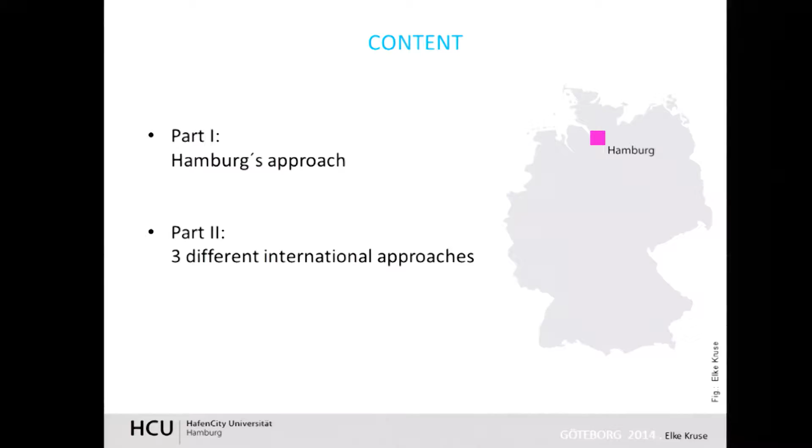In the first part of my presentation, I'm going to tell you a bit about Hamburg's approach in dealing with stormwater management. And in the second part, I will present to you 3 different international approaches, which are also dealing with stormwater management, and they are pretty similar to the things we already heard this morning and also this afternoon.

First of all, some facts about Hamburg. Hamburg has a lot of open water bodies, and therefore we really have to deal with water or with stormwater. And the annual amount of rainfall is similar to Gothenburg and probably also to Seattle, as I just learned. And at the moment, we've got 1.75 million inhabitants in Hamburg.

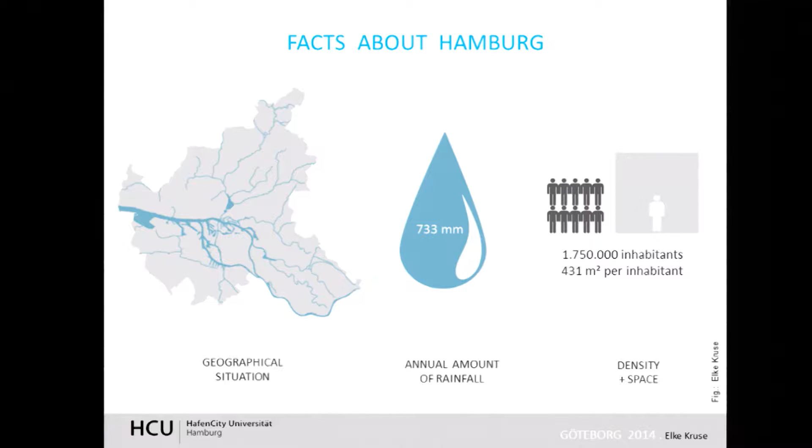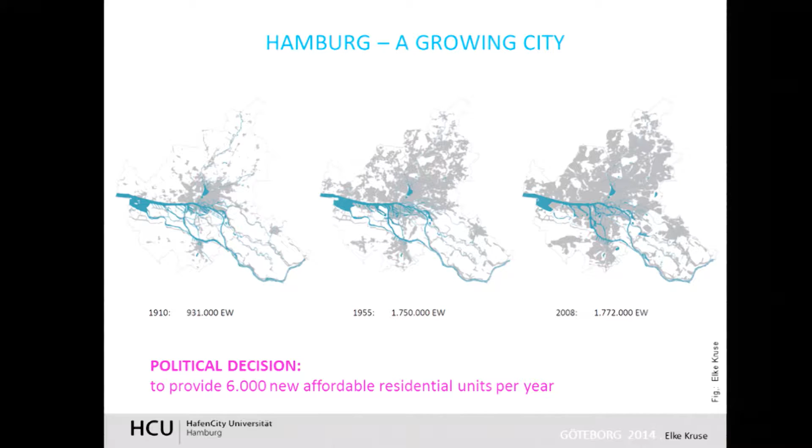And Hamburg has always been a growing city, and what you can see here, the growth has happened over the last 100 years, more or less in the outskirts of Hamburg. And given the fact that we are still growing, the politicians decided that we have to provide 6,000 new affordable residential units each year, and this should be done by redensification of this inner city area. And in this area, we've got a combined sewer system. And this system is already 150 years old.

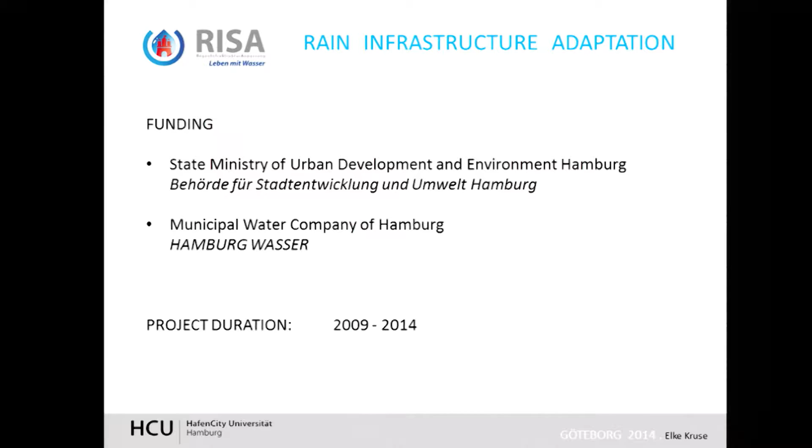And therefore, 5 years ago, this project has been set up. It's a project funded by the State Ministry of Urban Development and Environment Hamburg, and also from the municipal water company of Hamburg, which is called Hamburg Wasser. You probably heard of it before. And it runs until the end of this year, so everybody right now is really busy finishing all the plans that we need to provide for the politicians so that they can decide if we can continue with this project, if we can implement all the plans that we prepared in the last 5 years. So it will be really interesting for us what's going to happen in spring next year.

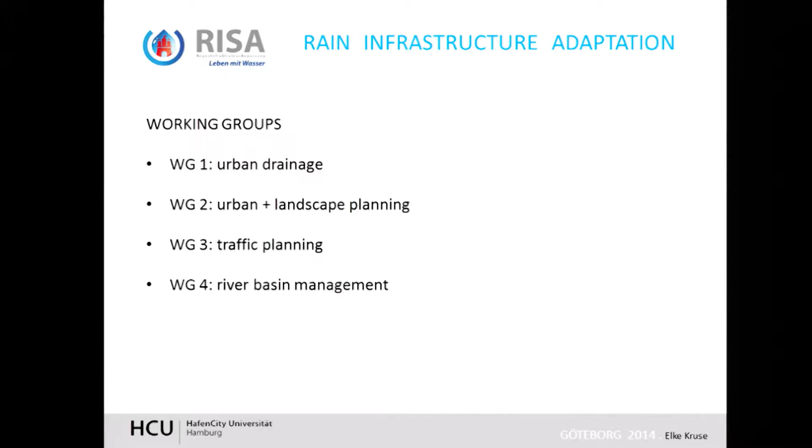And this project is called RISA. It's a short form for Rain Infrastructure Adaptation. We have been working in 4 different groups, and we've been an interdisciplinary team. So the first group was focusing on urban drainage, the second one on urban and landscape planning, the third one on traffic planning, and the fourth one on river basin management. And our university has been involved in the second group, so we were really looking at urban and landscape planning aspects.

And at the beginning of the process, our university set up a kind of a toolbox for an integrated stormwater management. And by using this term, we mean the interdisciplinary cooperation of drainage engineers, water managers, but also of urban and landscape planners, and also traffic planners. And I think we heard about this already from Seattle and from London and from other cities. And the aim of the project is to provide sufficient flood protection, water protection, and a near natural water balance.

And what is missing so far is that, because this project is led by engineers, they are not focusing so much on design qualities, what it means for the public space. And this is what we try to achieve, but we are still in the process. And we are looking at 5 different topics when we are talking about integrated stormwater management. The first topic are the planning instruments, for example, a zoning plan and things like this. We are also looking at new technologies, but they're not really new, but how can we integrate them into a sustainable urban drainage system? So we're looking at green roofs and multifunctional areas.

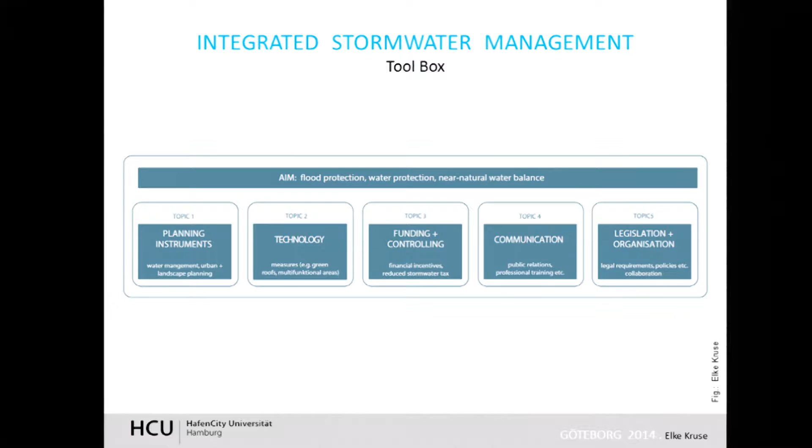It's also a lot about communication, but what we discovered is that we already have a lot of best practice examples in Hamburg, but there's still a lack of talking about the experience and how you can design it in a good way and what you might have to improve over time. And it's also about legal requirements and policy. What kind of additional policies do we need, or do we have to change some of our policies? And this is all part of the project RISA.

And one of my colleagues, Sabine Andresen, was looking at the planning process in Hamburg. So when it starts from the design competition and the zoning plan up to the implemented project, what can happen in this period with the idea of a sustainable drainage system or an integrated stormwater management? And what we have at the moment in Hamburg is that nobody really knows who is responsible for all the different aspects related to water. It's very complex. Even the members from the local authority don't know. So that was really something we thought, well, it can't be, so we want to change this.

And also the planners, most of the time they are not really aware of the aspects related to water, and also that they need to consider the effects of climate change in their design. So we really need to provide more professional training on this. And sometimes it's difficult to find good solutions within the boundaries of your project area, because you need to consider a wider area to find suitable solutions. And therefore, some of the projects can't be built because we can't manage the water on site.

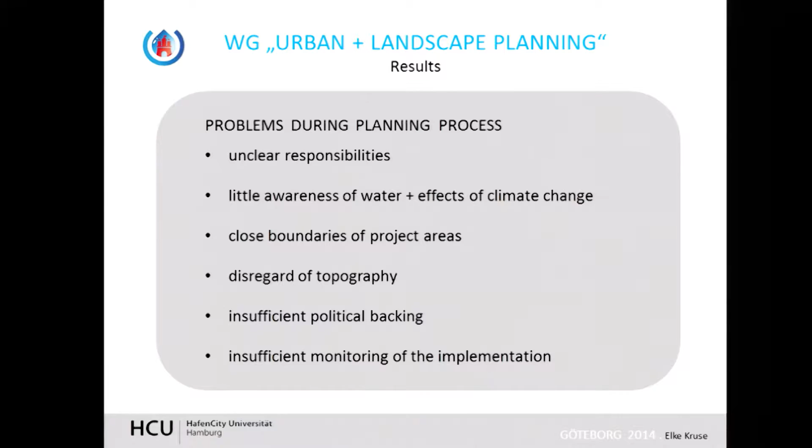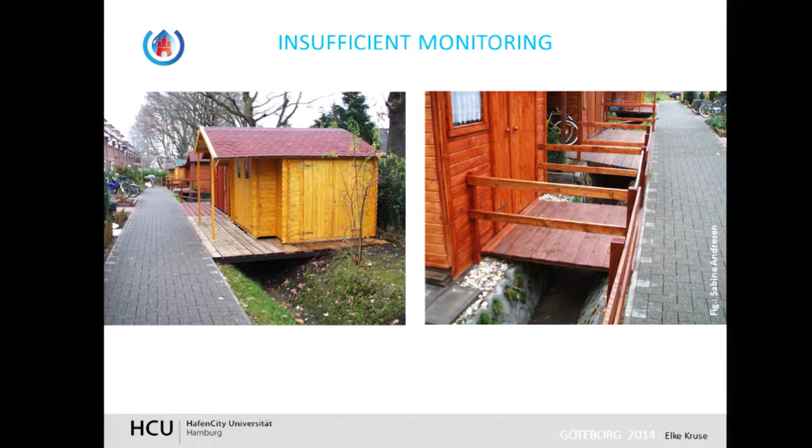During the design process, this was a green vegetated bioswale. And at the end, the property owners decided, okay, we need more space. We want more of these little garden huts. So they put them on top of the bioswale, and now it's a concrete channel. So the whole idea, the whole concept is gone. But this is also a best practice example. We call it a demonstration project. And this is already 15 years ago. So we have quite a lot of experience in implementing sustainable urban drainage systems, but we still need to explain it more to the members of the local authorities.

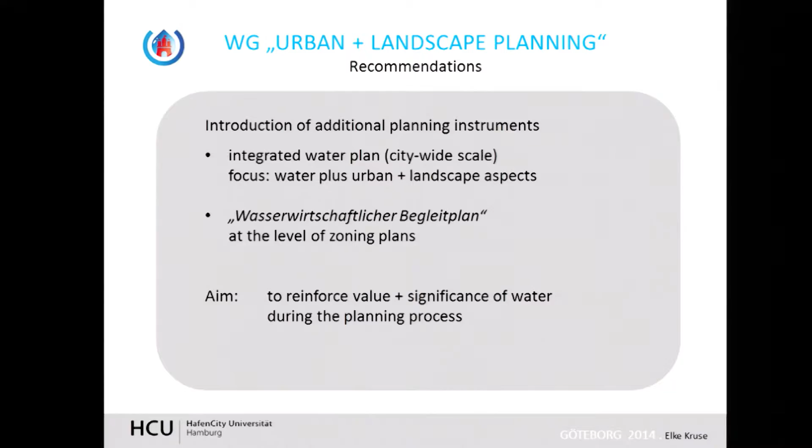And therefore, one of our recommendations is that we want to have an integrated water plan at a city-wide level, which doesn't only look at water aspects, but also focuses on urban landscape aspects and also design. And at the level of a zoning plan, we want to introduce a plan we call Wasserwirtschaftlicher Begleitplan. I couldn't translate the term into English. It's a typical German word, I think. It's a kind of checklist to make sure that the planners think about all the aspects related to water, that they think about the effects of climate change, that they have a look at the topography, and they might be able to think outside the box, so outside the boundaries they've got. And with these instruments, we want to make sure that we reinforce the value and significance of water during the planning process.

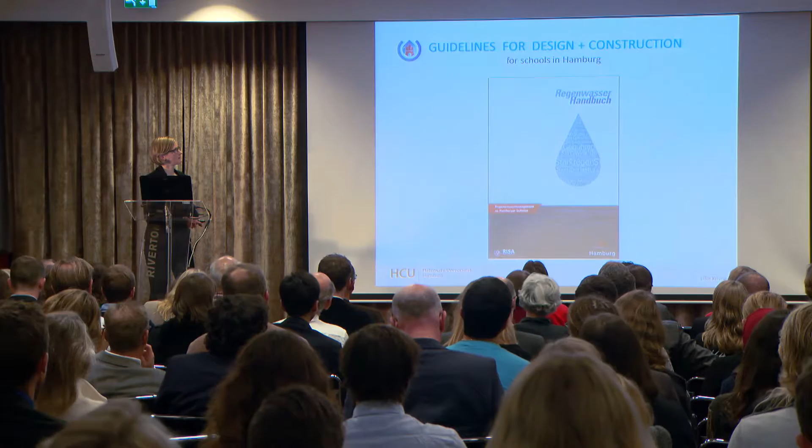And also one of our team has set up a guideline for design and construction, especially for schools, because at the moment the agency dealing with schools has about 1,000 projects running only in Hamburg, because they have to change a lot of things by law. Some of the projects are small, they just have to change some windows, but some projects are bigger, they have to build new schools or new cafeterias, and therefore they have to rearrange the schoolyards. And we want to make sure that they think about stormwater management on site. So it's a really important stakeholder for us to implement the idea in Hamburg. Unfortunately it's only in German, but in case you understand German, you can download it from the internet.

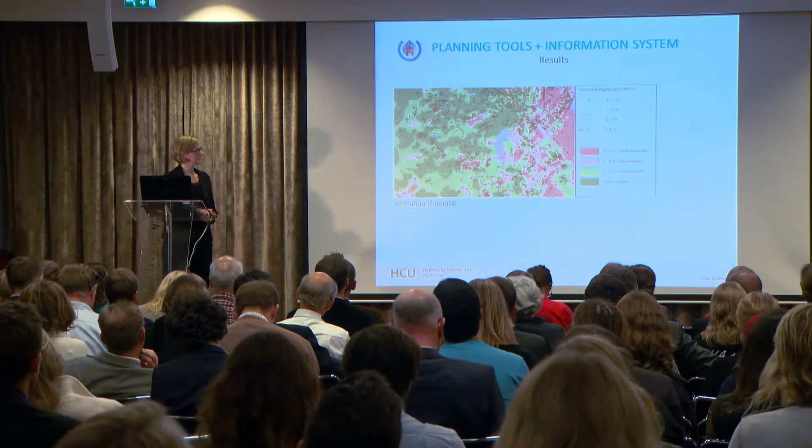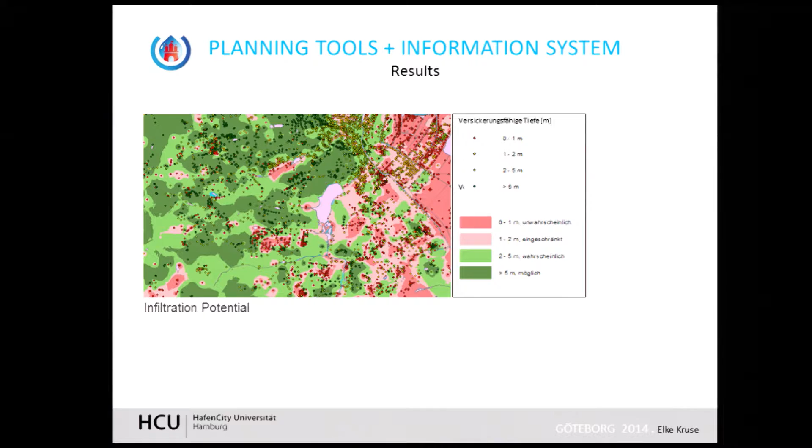Also, some of the team has looked at different planning tools we need to provide to make sure that more planners think about the whole idea of integrated stormwater management, and they prepared some additional planning tools and a GIS information system. And this is one of the plans they prepared. It's a map showing the infiltration capacity in Hamburg, because some people said, well, we can't infiltrate in Hamburg. It's definitely not possible. And you can see here the green areas are the areas where we can infiltrate. So in some areas it is difficult, but in other areas you have a lot of options to deal with stormwater.

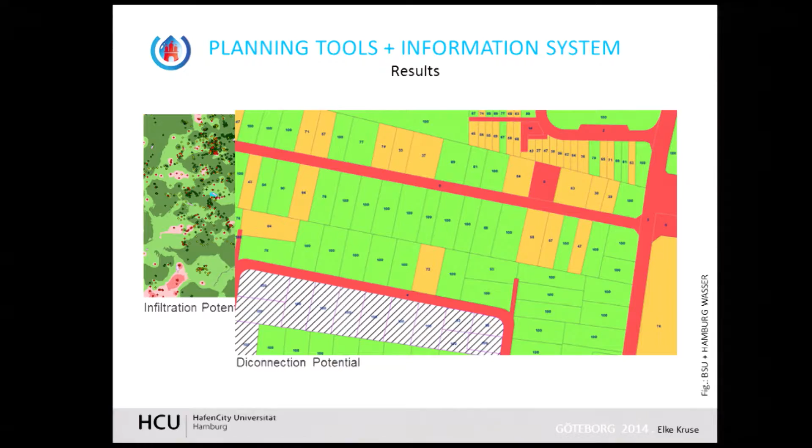And based on this, they produced another map. This shows if you are able as a property owner to disconnect your private plot from the sewer system so that you can get the reduced stormwater tax. I think this is really an important step, because we have got quite a lot of single houses, so low residential housing in Germany. But what they have missed so far - here you can see these are the streets - they said, well, we can't disconnect the streets at all. They are all red.

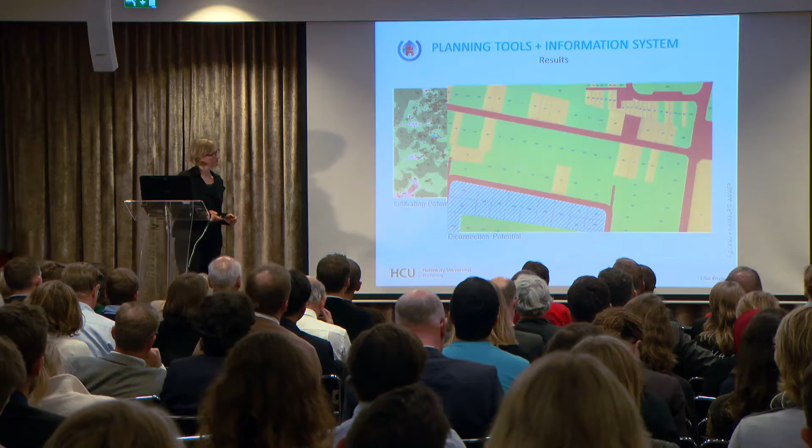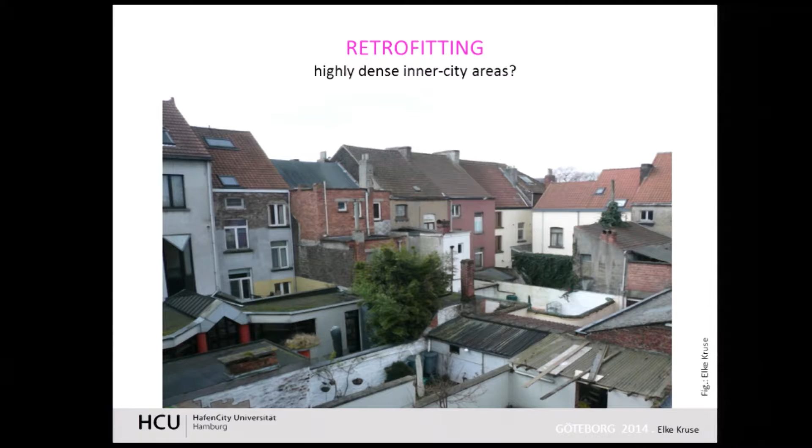This is something we should have a closer look at, and this is what I did within my PhD project. Here you can see a typical image from a highly dense inner city urban area, typical situation for a European city, where we've got a high ratio of impervious surfaces, very small plots, and hardly any space to implement any kind of sustainable urban drainage system on site. What are we going to do with these inner city areas, because they are affected badly by climate change?

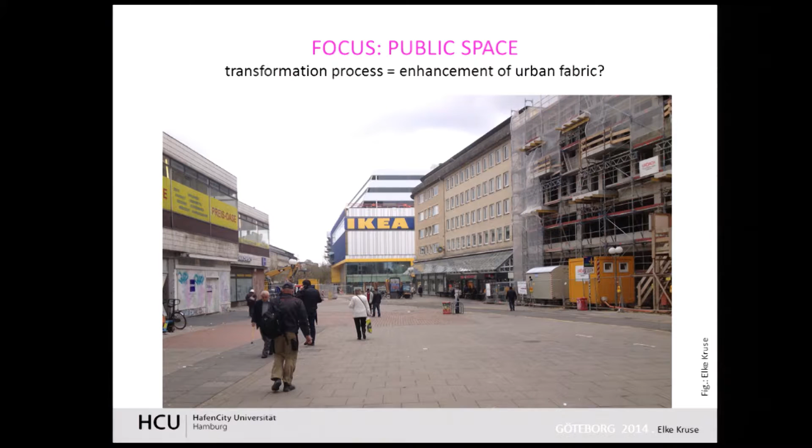Therefore, I think we really have to focus on public space, and I think the United States are already doing it, but we in Germany, and especially in Hamburg, we are not looking at that at the moment. And if we have to change our sewer system or transform it somehow, why don't we use the money to enhance the urban fabric at the same time? It might not be the only solution, but it might be an additional solution.

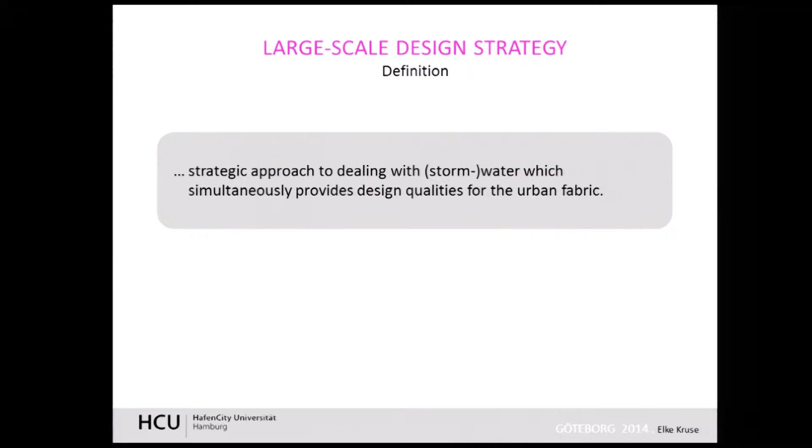And therefore, I was looking at different, I call it, large-scale design strategies. So that means it's a strategic approach in dealing with stormwater management, and you think about the design quality for the urban fabric at the same time. This design strategy applies to the whole city, but you can also see it at the end of the project, if it will be implemented.

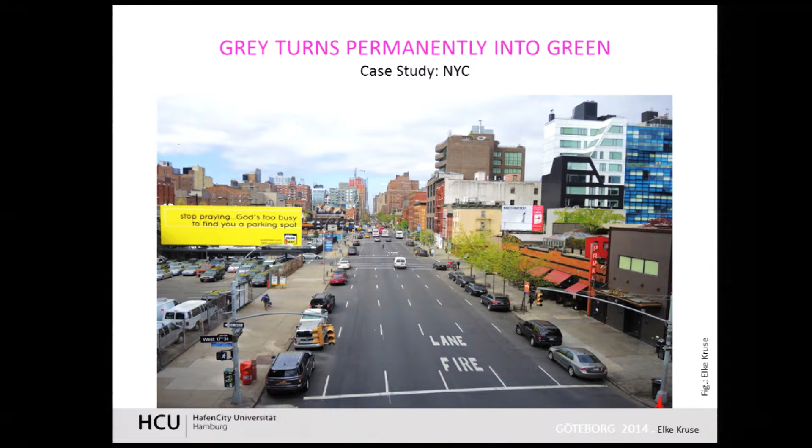What are they doing? One option is to turn grey permanently into green, and this is what we heard from Seattle as well. And I had a look at the case study New York. Here you can see it's a typical picture from Manhattan. We've got a high ratio of impervious surfaces, very densely built, and a lot of public space, or especially roads.

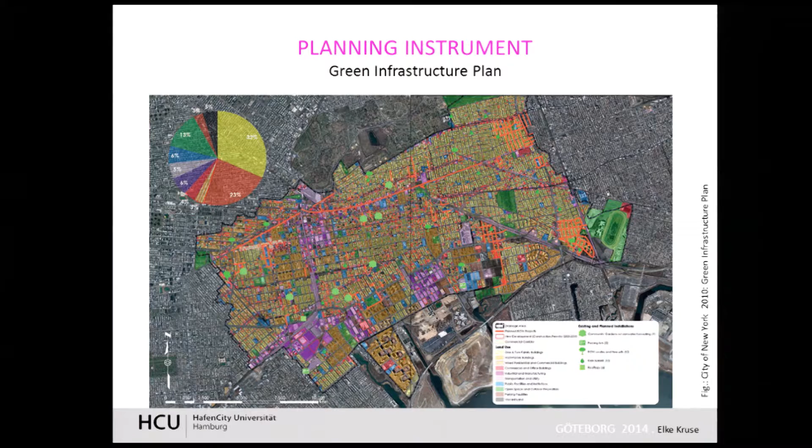And what they did, they started with a green infrastructure plan. For each catchment within the city they had a look at and checked where they can implement a sustainable urban drainage system. They started to have a look at the different urban structure types they have - if they have, for example, industrial areas, semi-detached houses, or commercial buildings. And what they found out, is that it's easy to think about the public rights of way, because this is 30% of the area. So it really makes sense to adapt or retrofit these areas.

So what they did - this is the initial situation again - they put a green network on top as an additional layer on the urban fabric. And here you can see, we heard about this program, I can't remember the name anymore, 1 million new trees in New York, and this is what they did. They planted additional trees, they added some infiltration measures along the streets, and they also created new parks, or redesigned existing parks.

And with all these measures, they are able to infiltrate more stormwater on site, and with this, they can reduce the surface water flooding and also the combined sewer overflows. Here you can see some images - this is a typical green street, and these are some of the additional trees, also along the street as well.

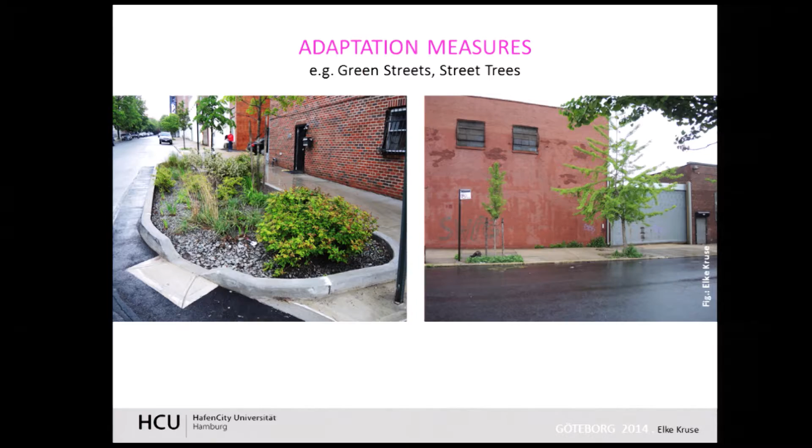But if you want to apply this design criteria to a city, you need to have the potential for infiltration. So you need to have permeable ground, sufficient distance to groundwater, and you need to think about soil contamination. And of course, you need to have the availability of space. So you need to think about this.

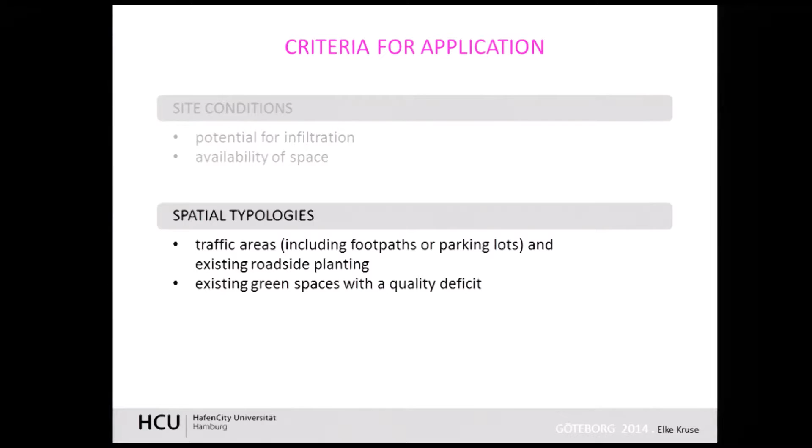And if you want to apply this design strategy, it applies to traffic areas, so including footpaths and parking lots, but you can also apply it to existing roadside planting or existing green spaces. If they have a quality deficit and you want to redesign it anyway, then it makes sense to think about whether you could infiltrate stormwater on site as well.

Another case study with a different approach has been taken by Rotterdam. They are turning grey temporarily into blue. Similar to Dordrecht, Rotterdam is 2 meters below sea level on average, so they have a really complex pumping system to keep the city dry, and therefore infiltration is not that easy in Rotterdam.

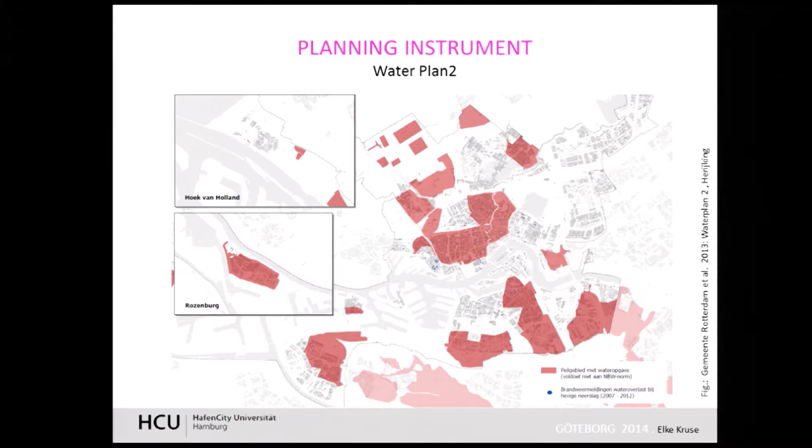They started with an interdisciplinary planning instrument called Waterplan 2. At the beginning, they analyzed for each catchment in the city where they need to provide additional water storage capacity to keep the city safe and dry. These are all the areas in red where they need to provide additional storage.

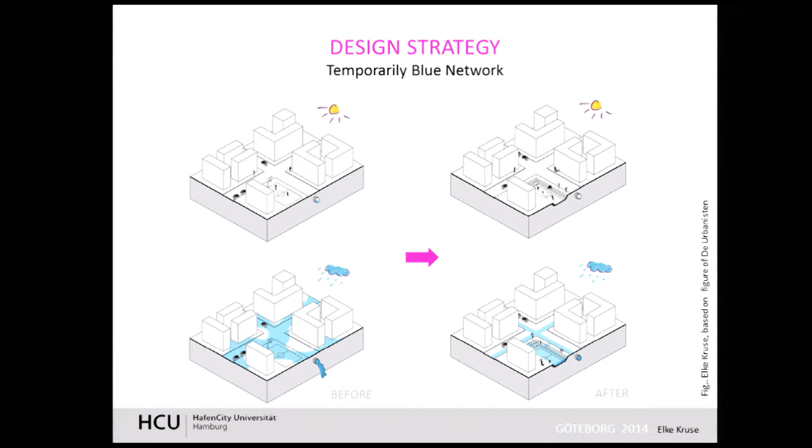What they did is add a temporary layer on top of the urban fabric — a temporary blue network. Here you can see how it works: you can see it only when it rains, otherwise you won't even recognize this network. For this network, they invented a special adaptation measure.

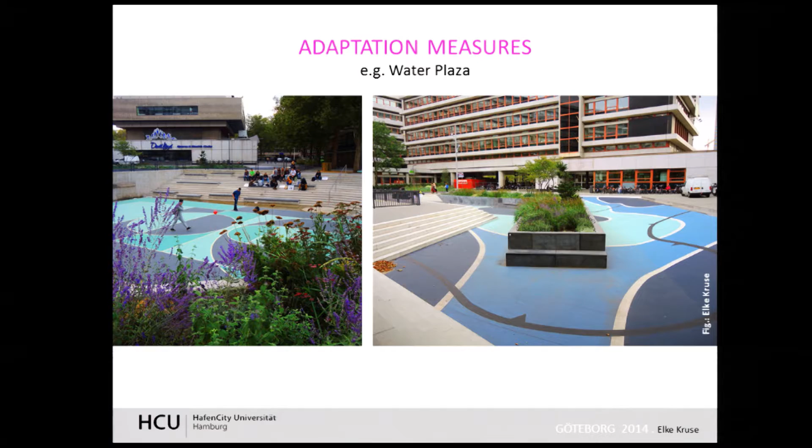They call it Waterplaza. We heard about this from Rotterdam. So they added some basins into an urban square. Normally you can use this urban square for football, for basketball, or you can just hang around, or skate along this basin. In case of an extreme storm event, this basin fills up temporarily, and then it keeps the rest of the surrounding city dry.

If you want to apply this strategy, it makes sense if you have no potential for infiltration — for example, if you haven't got permeable ground, or your groundwater is too high, or you have soil contamination, or you just don't have the availability of space for infiltration.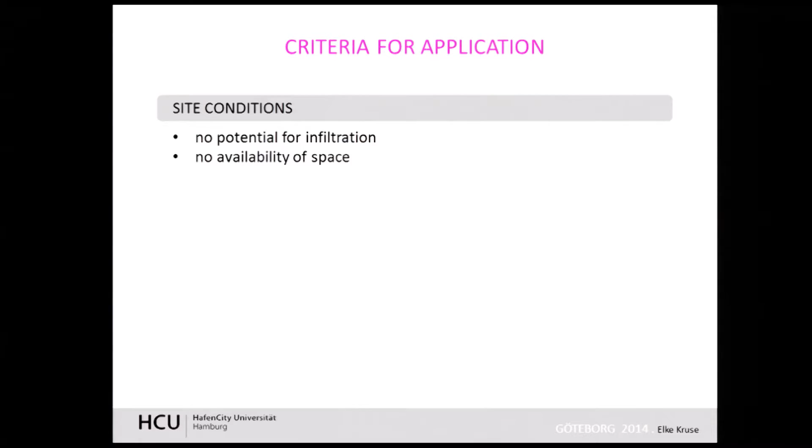This applies to district squares, playgrounds and sport fields, but you can also use parking lots — you just need to check that people still have dry feet if they want to get to their cars. Or you can also use streets, or at least parts of the streets, to convey the water to these water squares.

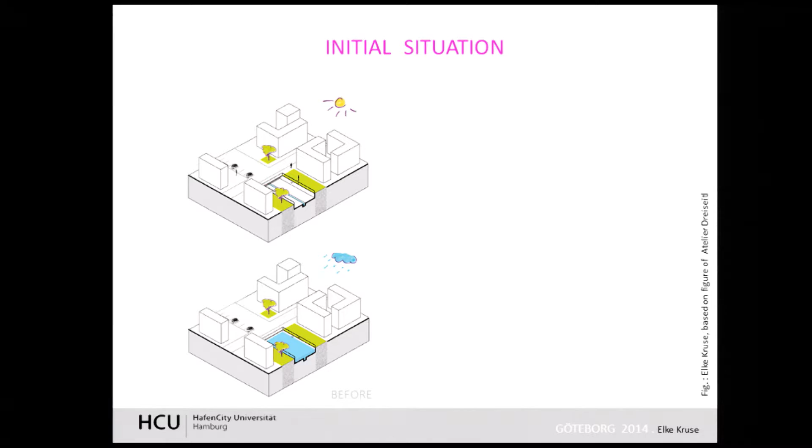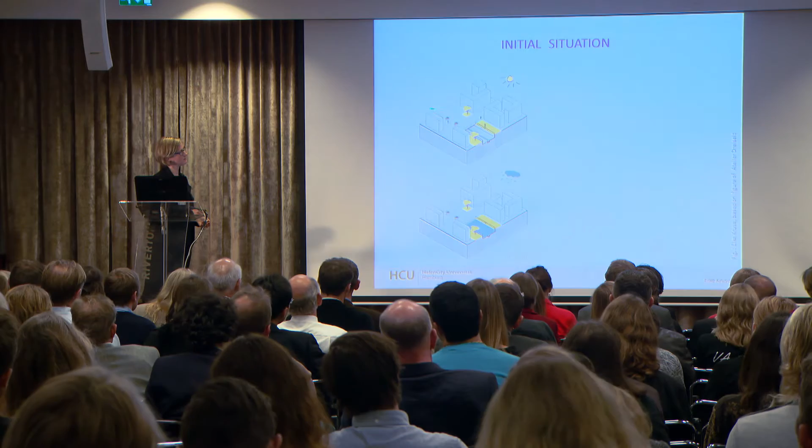We also have different situations. We heard about London and the river system there. So you have open water bodies too, and especially in the more dense areas, they are more or less channelized or piped. If we think about more impervious surfaces or also more extreme rain events, sometimes the capacity of this system is not sufficient anymore, so it makes sense to think about a different approach.

I had a look at Singapore, and they turned grey and blue permanently into blue-green. This is a typical situation: Singapore has all these concrete channels all over the city to convey the stormwater as quickly as possible, and it's definitely not a beautiful situation.

What they did is add, where they can, where they have the space, a blue-green network on top of the city. Here you can see they combined the water system with the surrounding green space. But what you also can see is that you need a lot of space for doing it. What you can do, just by digging or by changing the topography, is provide as much capacity as you need for your stormwater runoff.

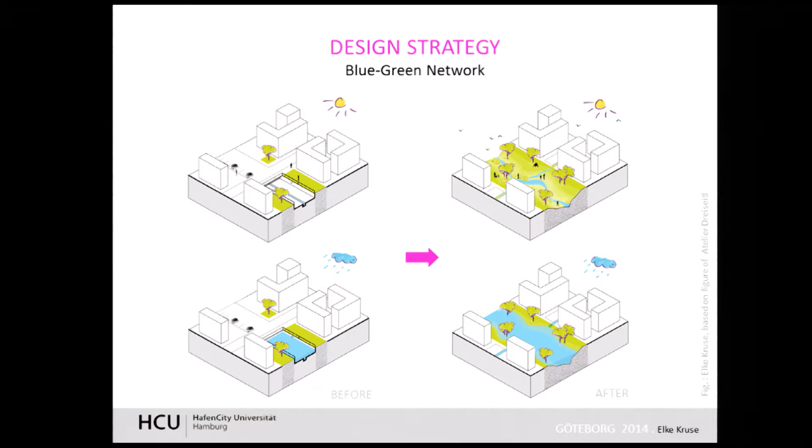At the same time, you can provide additional benefit for biodiversity issues, but you can also improve water quality if, for example, you integrate some cleansing biotopes. Here you can see how it looks: before it was a concrete channel here, and now they've redesigned it. They renaturated the river section, and people are really getting contact with the water. They're really happy, and it's an absolutely beautiful park right now.

The site conditions are slightly different here. You've got little potential for infiltration, but you definitely need to have space — otherwise it doesn't make sense to think about this design strategy. This applies to river sections or piped river sections.

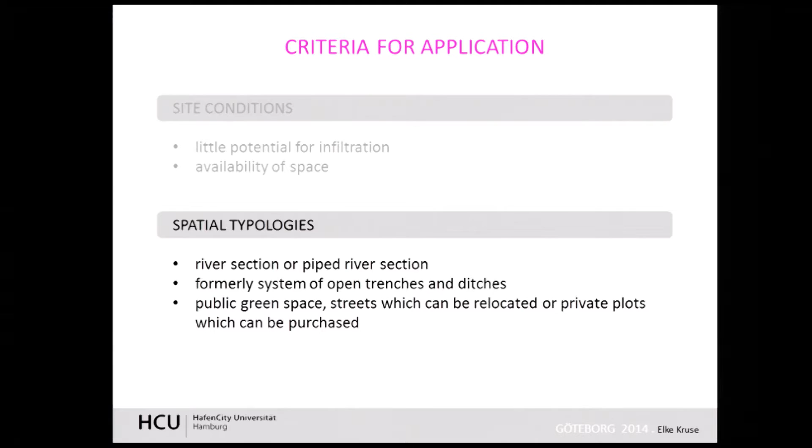You can also use a former system of open trenches and ditches, but you need to have public space next to it, or you have to relocate streets — this will be done in some cases as well. Or you have to purchase private plots to have the space you need for the river and the surrounding park.

I also had a look at what all these cities are doing — what kind of working steps they go through in implementing integrated stormwater management. First of all, they all set up an interdisciplinary team, and I think we probably all agree on this topic.

Then they started to identify priority areas on a citywide scale, looking not only at the water but also at the public space — where do they have a quality deficit? They all considered the different urban structure types we have, because at the moment in Hamburg we are only focusing on implementing sustainable urban drainage systems on private plots. But what are we doing in the inner city area? We are still in discussion about how we deal with this.

Then you need to do some preliminary assessment. For example, you have to analyze your infiltration capacity, or you also need to analyze where you have space available, because then you can decide for the right strategy.

And we heard about this as well—I think it was key that we need to have a vision. All the stakeholders need to know what you're talking about. So if you want to have a green city, which doesn't only mean climate mitigation but really building a green city by implementing more green streets and trees, everybody knows what you're talking about. And this needs to be supported by a political resolution, because you have to spend a lot of money, and it's not only for a couple of years—it's over 10, 20, maybe 30 years, depending on the size of your city.

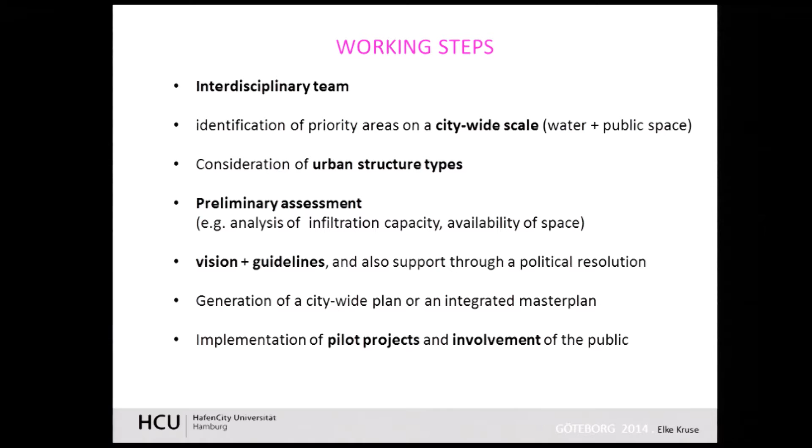And then you definitely need to start with pilot projects. This is what all the cities have done, because in each city the conditions are slightly different. What I learned from Hamburg, and it's probably similar in other cities, is that members from the local authorities only believe in projects that are built in Hamburg, because they say, well, in Hamburg it's completely different—we can't just take the experience from other cities.

And in this project, you can involve the public, take their concerns on board, and try to involve them in the whole idea of sustainable urban drainage systems as well.

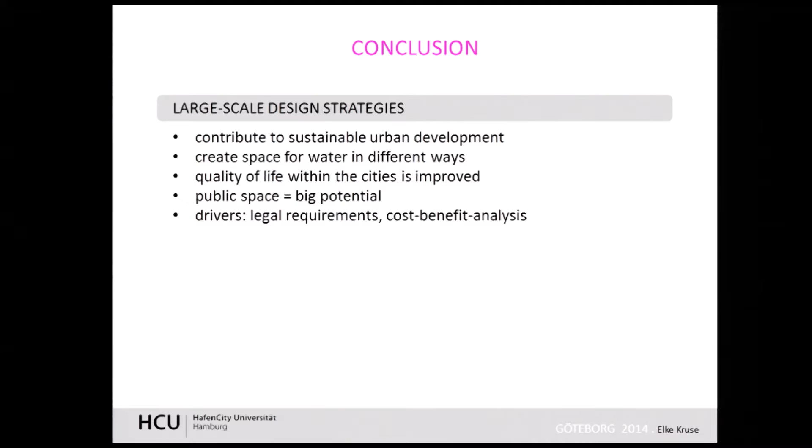So now I'm coming to my conclusion. If you apply these design strategies, you can create a sustainable urban development and create space for water in very different ways, depending on the site conditions you've got in your city. And at the same time, you improve the quality of life in your city, and public space really provides a big potential in doing it.

You just need to have a closer look at this. In most cases, the drivers are the legal requirements and also cost-benefit analysis. We heard about this already—you can spend all the money in grey infrastructure, but what is really your benefit from a social aspect, from ecological aspects, and things like this?

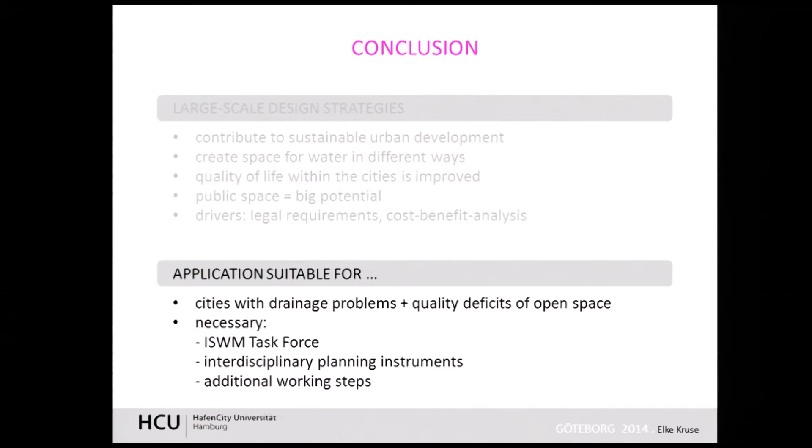And these design strategies are suitable for cities with drainage problems, but also when they have quality deficits of open space. It's necessary to set up what I call an integrated stormwater management task force. It's a long term effort, but I think it makes clear that you really need a group of people who really pushes the idea forward.

And you need to have these interdisciplinary planning instruments which combine all these different aspects. And then you have to go through these additional working steps, and then I think you can make sure to really implement an integrated approach.